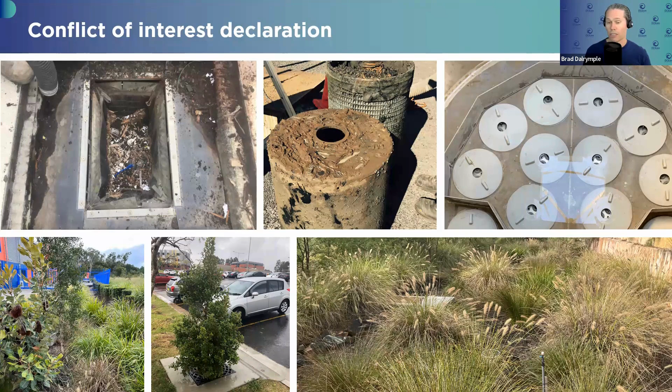So that's pretty cool. And look, before I dive into the main presentation, just a conflict of interest declaration. So yeah, obviously I work for Ocean Protect. I'm their principal environmental engineer. Ocean Protect do make money from selling stormwater treatment assets. So we make money out of installing them and maintaining them. So just keep in mind that I do have a conflict of interest in this space. But throughout the presentation, I've tried to be as transparent as I possibly can. But yeah, it's just worth noting that, obviously.

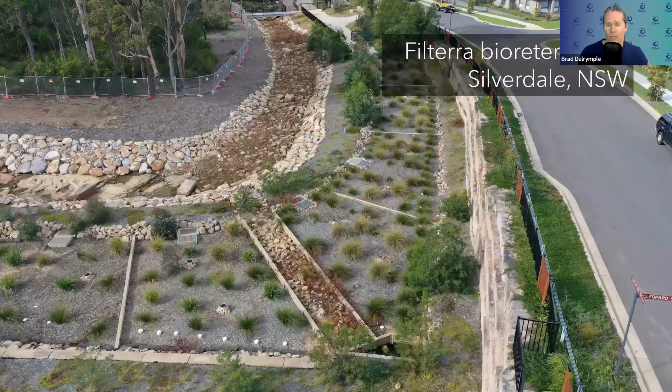So first up, integration. The key considerations when it comes to getting integration of assets, so bioretention, wetlands, swales, GPTs, SQIDs, are these: maintenance, access, safety, area usage, and amenity. So if I show you some examples, these are good examples of good outcomes. Really good amenity, really good stormwater treatment function, maintenance, access, etc. Ticks all the boxes, and there's a lot of examples like this across Australia, which is great. So these are bioretention systems, for example. This is a Filterra bioretention system. It was a very constrained site, but we managed to integrate it appropriately.

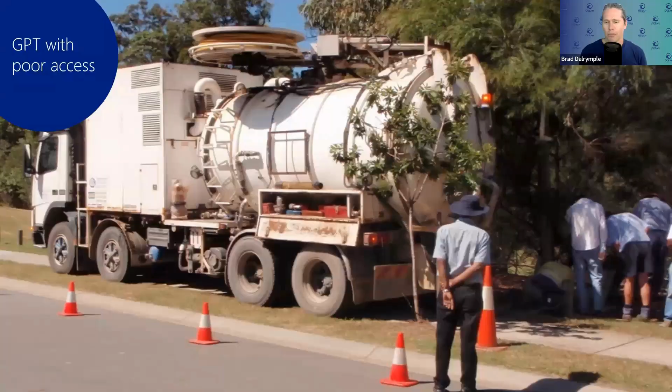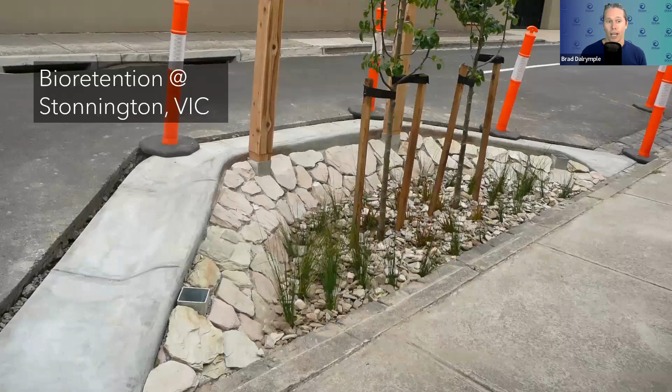But unfortunately we often see this. So again, one thing to keep in mind when it comes to your development assessment or development review would be trying to make sure, to the best of your ability, that the integration is done properly. And this is a classic example. This is the one in Brisbane, in Brighton. This is the bioretention system, by the way. Retaining walls around all sides of the bioretention system.

There's like a 1.5 meter or 2 meter drop on the downstream side, and obviously high retaining walls around the whole thing. And to get into the system, you have to climb via a ladder into the bioretention system. So very, very difficult to access, maintain, etc. And obviously, this is just a bad outcome.

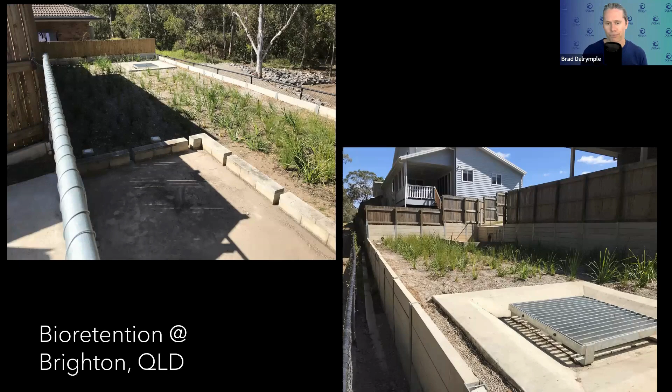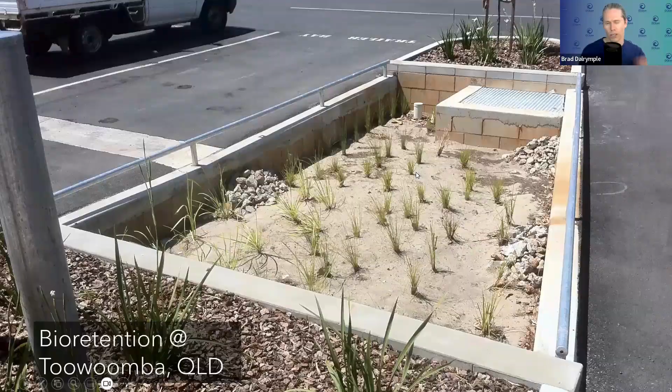And I've shown this example before where, if you just fall into the bioretention system, you probably trip, and by the time your head reaches terminal velocity, it's probably coming into contact with a concrete edge on the other side of the system. So we laugh about it, but it does happen, and certainly through appropriate design review, and maybe development design assessment, from council's perspective, we could have avoided something like this happening.

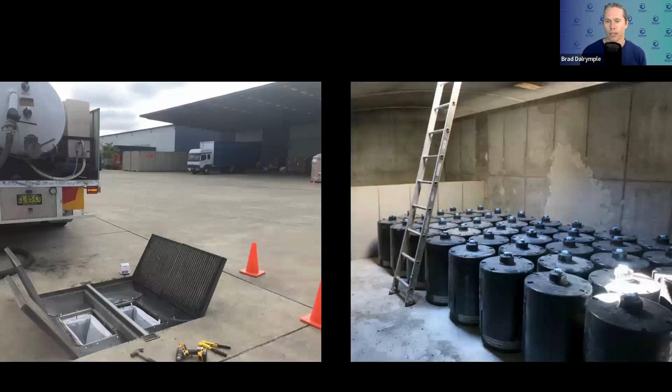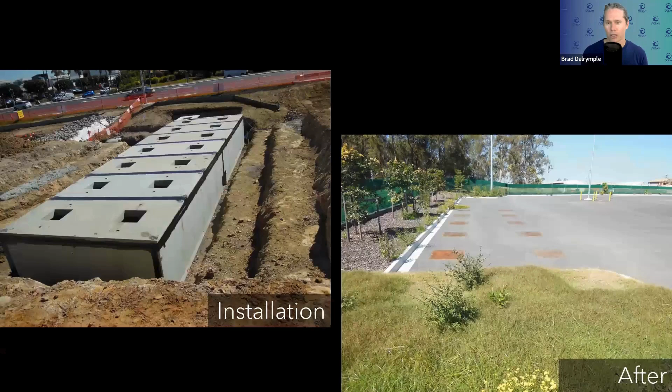Sometimes the easiest option in terms of achieving good integration is just putting it below ground. Now, again, conflict of interest, Ocean Protect sell devices that can be integrated underground. But from my perspective, it's often the best solution, particularly for a constrained site. And a lot of sites are highly constrained, even with the best planning and conceptual design in the world.

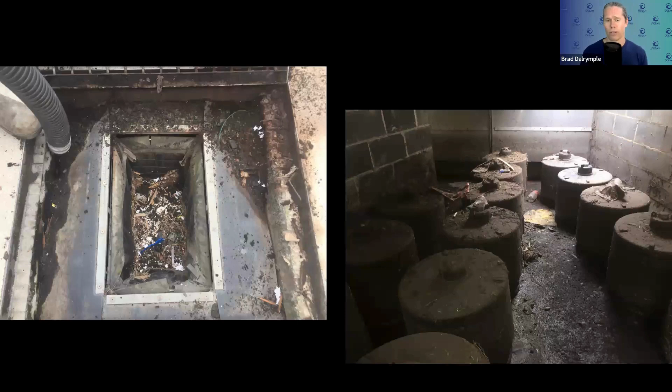So in this case, for example, we can put in a detention tank or a chamber as part of the civil construction, and then just cover it over with, in this case, asphalt, but it could equally be landscaping, grass, etc. And then obviously you can easily access these to maintain via a sucker truck or whatever. The pollution is away from the public, so there's no risk of that contact. And it's basically easy to maintain.

So that's a quick overview of some key considerations when it comes to integration. Let's talk about water quality now. And it's worthwhile noting that water quality and hydraulics basically go together hand in hand. And I'll explain that in a sec.

So a key assumption when it comes to stormwater treatment assets is that they will function as intended. So when you're setting up your MUSIC or whatever model you use, there's a key underlying assumption that the system, whether bioretention or wetland or GPT or whatever, will function as intended. And there's a whole bunch of assumptions that go into that. First up, you're assuming that the asset's going to be in good condition. Number two, you're assuming that the treatment system is fully utilized.

And also, particularly when it comes to proprietary devices, and again, full disclosure, we make proprietary devices, there's an assumption that everyone can be trusted when it comes to their performance claims. But unfortunately, time and time again, that's shown not to be accurate. And I'll show some examples in a sec.

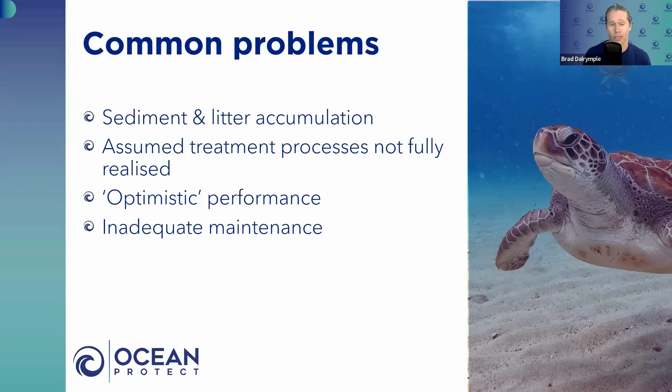So in terms of that assumption being wrong, these are some common problems that I see. Sediment and litter over-accumulation, number one. Sometimes the treatment device just isn't utilized to its full extent. I'll show some examples in a sec. Optimistic performance claims I touched on, and just poor maintenance. So I'll show you some examples.

And I was just looking at a project just a couple of days ago around this. Won't mention where, just because I think they're actually tuning into the webinar today. But this is a common scenario, unfortunately.

But even construction phase sediment loads aside, and we know that they're higher than the operational or fully developed phase, we still see a lot of pollution coming from fully established urban catchments. And I've shown this example before. This is what we pulled out.

We had 8 gully pit baskets, 8 OceanGuards, in a pretty stock standard street in Western Sydney, and they were in the ground for 5 months. So just 8 OceanGuard gully pit inserts in the ground for 5 months, treating a reasonably small catchment, and you can see what we pulled out. And this is again a fully established catchment.

So a bunch of plastic, bunch of everything, typically single-use plastics, obviously a whole bunch of sediment, and that stuff isn't just going to magically disappear. That's going to have to be manually removed from, in this case, the devices. But also, if the devices weren't there, that'd just go straight into a downstream waterway or other secondary treatment device.

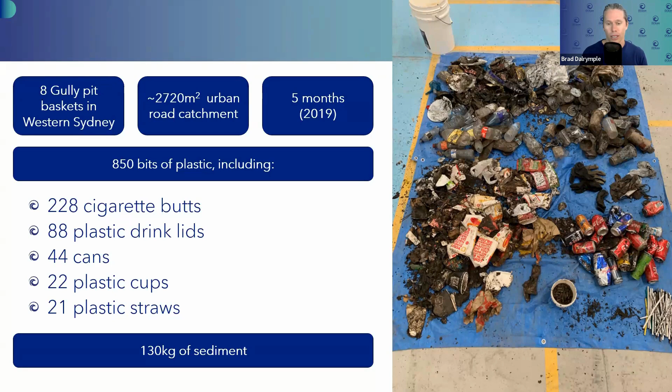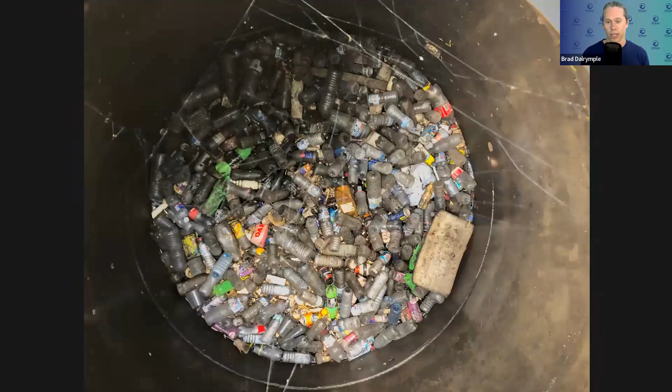And I showed an example of a bioretention system full of litter the other day on LinkedIn, if you've seen that, and obviously we've got a whole bunch of photos of end of line GPTs full of sediment, full of litter, etc. And these are some photos courtesy of Dan Rhodes, I think, who is on the call today. Yeah, this pollution just doesn't magically disappear. It needs to be appropriately maintained, and obviously, if the GPT is completely full, it just won't work. Okay, so the assumption that it's working is often not accurate at all.

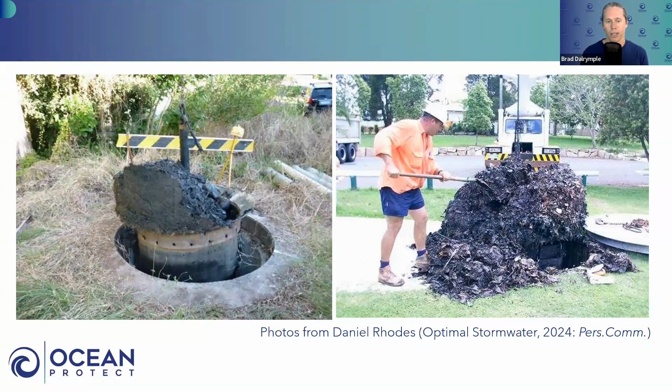And another example of this is from Ralf Pfleiderer from Wave Consulting in Victoria. These are some bioretention systems in Little Collins Street, just full of sediment. So Little Collins Street, fully urbanized, nothing but shops and roads and all that sort of stuff, just full of sediment. So I think a lot of stormwater professionals forget that you can still get a lot of gunk, even sediment, from completely urbanized environments with no exposed soil. I remember Ralf talking about how there's a lot of hair in these bioretention systems. So yeah, a whole bunch of gunk comes from our urban environments, unfortunately.

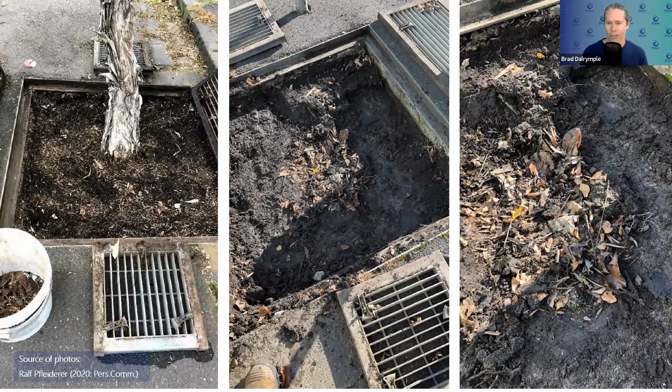And bioretention systems are a physical filter. They obviously have biological processes happening, but that sediment, that litter, will accumulate, and it obviously needs to be removed. And if it doesn't, the system probably will have an impaired function.

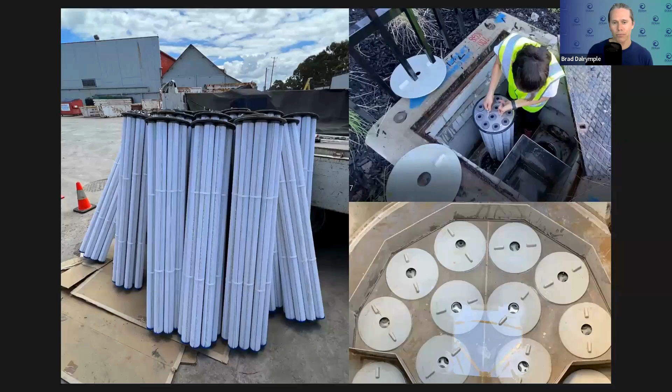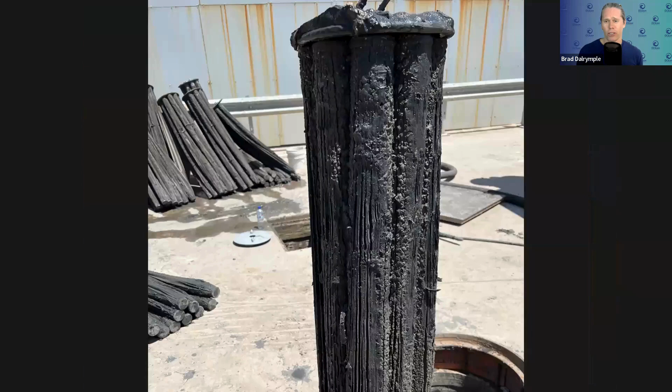Another example, this is new jellyfish tentacles going underground, and that's what they can be like after they've been in the ground for a while. So again, new jellyfish tentacles, membrane filtration. For me, it just shows you what is in stormwater. This pollution, the hydrocarbons, the dirt, the microplastics don't just magically disappear. They need to be appropriately maintained. And if we just leave these assets in, or if they're undersized, etc., they will not function as intended.

Also, a common thing I keep seeing with bioretention systems, and particularly bigger bioretention systems, is there's an assumption that the water just magically spreads over the entire system, because that's what MUSIC assumes. MUSIC assumes that water comes in, ponds and then drains down equally across the entire filter media surface. The reality is that just doesn't happen for these bigger systems.

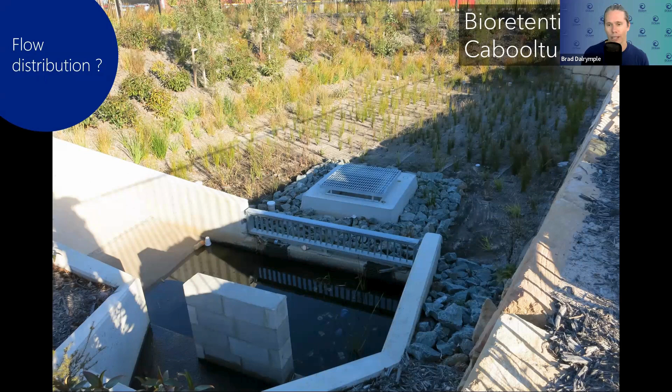So this is one in Caboolture, I think, by memory. Can't remember, I took the photo. Inlet coming in, and you've got the outlet pit immediately adjacent to the inlet, and obviously you've got areas still within the bioretention system that will probably struggle to get much water at all. Obviously, if you get a whole bunch of water coming through, the whole system will pond, etc. But yeah, in the majority of events, the small frequent events, the water will basically dissipate around the inlet, and we see that time and time again. So again, the model not matching the reality, unless it's appropriately designed with good flow distribution.

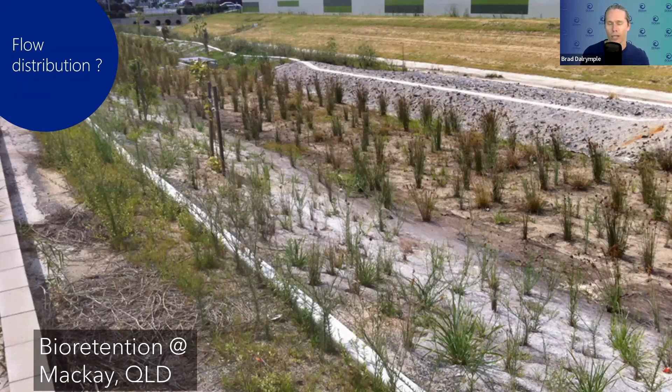This is another big system out at Mackay, a very long system that, again, is probably another example of poor flow distribution. There's an assumption that the entire system will be engaged in treating water, but it just won't happen. Often the plants will die a very slow and painful death.

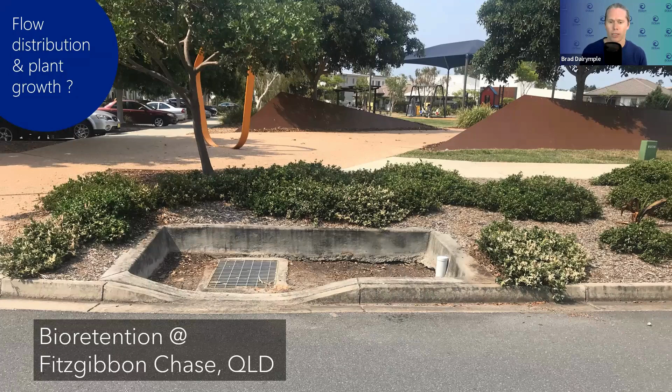And this is another classic example. This is out at Fitzgibbon Chase in Brisbane. There's quite a few of them like this, or at least last time I looked. The water will come along via the curb and go into this, which is supposed to be a bioretention system, via this curb cutout, the inlet, but the outlet pit is immediately adjacent to the inlet. Obviously, there's no plants, but this will obviously not function anything like what is modeled in MUSIC. So again, poor design and poor implementation means the system will not function as intended. And like I said, there's a few of these around Fitzgibbon Chase, or at least there was. I'm hoping council might have fixed them up by now.

So key recommendations in terms of this, I guess, water quality and hydraulics integration piece. And I guess this is a bit of an overarching statement, but there's a real need to make sure through your design review, design, et cetera, that the assets will function or likely function as intended.

A key thing I keep seeing is that appropriate maintenance access isn't provided. This is essential. So again, as part of your design review or construction establishment review or handover, making sure that at the very least the assets are appropriately accessible for maintenance is absolutely essential.

Obviously, during the construction establishment, there should be some sort of review and inspection. Water by Design and others have a whole bunch of checklists that you can complete to help achieve that. And for privately owned systems, and I'll touch on this later, for me it's essential that prior to any development approval, there's some requirement for ongoing condition assessments and maintenance of any assets that are put in the ground.

And again, when it comes to operation, there's a requirement to do checks to make sure the assets are appropriately functioning as intended. And if you're in council or a regulatory authority, ideally you review and enforce the condition assessment and maintenance requirements that are ideally agreed prior to development approval.

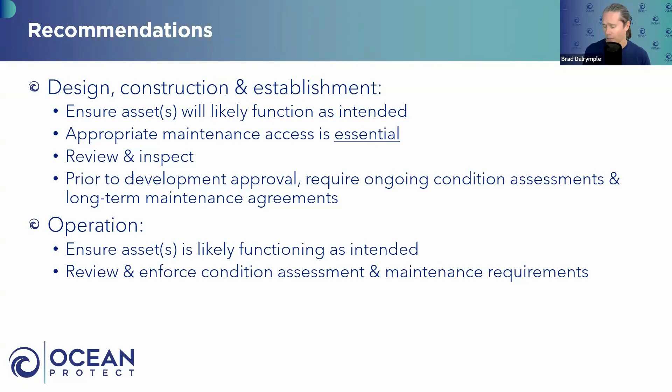I'm going to touch on proprietary SQIDs quickly. I guess the key thing from my perspective is the exaggerated claims around performance, whether that be water quality or hydraulics or maintenance. And this is probably an example of a device that I would perceive as making an exaggerated claim. I won't mention the device's name, but this is from their website, at least

historically. This device claimed extremely high rates of pollution removal: 100% removal of litter, 99.95% oil water removal, 97% removal for phosphorus, 95% removal for solids, and 85% removal for nitrogen. So no fancy absorption or biological treatment processes going on. It's basically relying on physical processes. And I'd suggest that those claims are extremely high.

But if you look at the data that the claims are based on, I don't think the data that's available, or at least the data that I've seen, would be enough to appropriately substantiate those claims in the real world. This is again from the same company's website. This is the information around their performance claims, and for me there's a few question marks on the methodology used

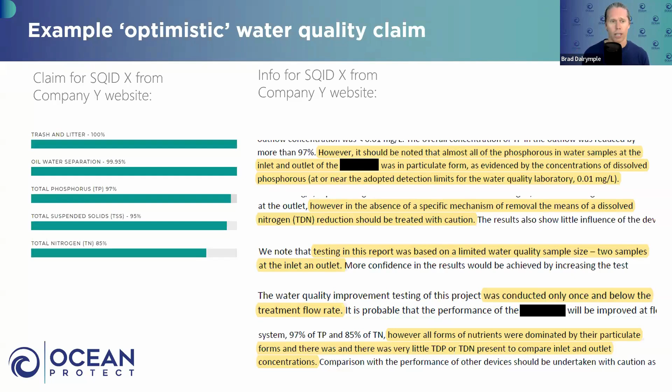And we know that dissolved nutrients are certainly present in the real world, but they did a mix of their own pollution, dosed that and took samples in the inlet and outlet, and that's what they based their claim on. They did the testing themselves, which again, I'd question the independence of. And it is a lab scale test, which invariably isn't accurate to reflect real world performance. So again, I'd question the claims, and I'd suggest that they're probably optimistic.

To give you an example of this in the real world, and another device: this is a gross pollutant trap. This is a project that's just come across my desk recently, a project in Brisbane. So just a development, proposed to drain to a gross pollutant trap, and this gross pollutant trap will achieve, according to MUSIC, extremely high rates of pollution removal. So 82%, 80%, 50%, etc. And that's extremely impressive for a gross pollutant trap.

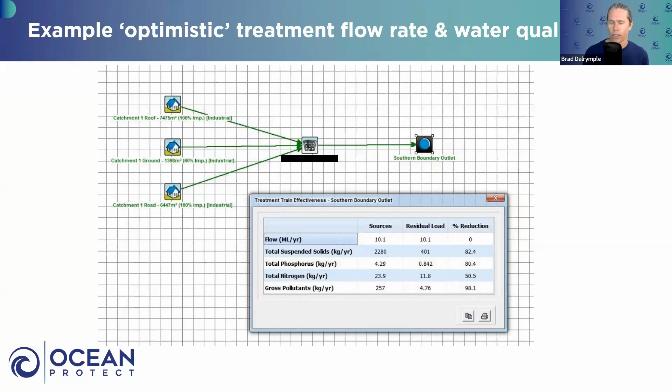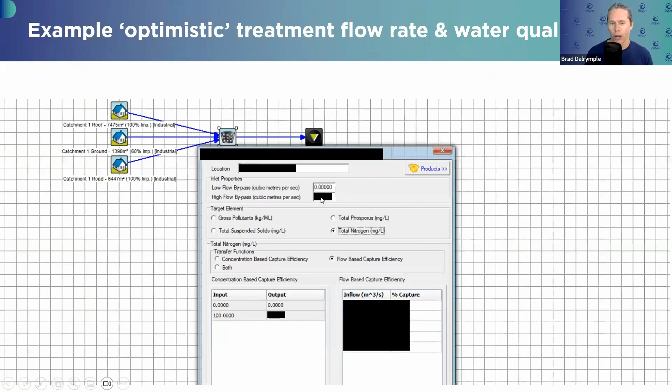If I was in council's position, or if I was reviewing that, there's a couple of things I would check. The first thing I'd check would be the high flow bypass. This is when I talk about hydraulics and water quality going hand in hand. To do that, you double click on the treatment node, the GPT, and check the high flow bypass rate. Just make sure that the high flow bypass is actually relevant to the GPT specified.

Now, this is something I see time and time again. A small GPT will actually be proposed, with a certain cost, but they've actually modeled a much larger, more expensive gross pollutant trap, or a device with just a really high treatment flow rate. A GPT, and any generic treatment node, will remove pollution up to a certain treatment flow rate, a high flow bypass.

Anything above that is bypassed. So any GPT or other device, like a proprietary cartridge, for example, will have an ability to remove pollution up to a certain treatment flow rate. Anything below that flow rate, it's treated to that standard. Anything above that flow rate, that high flow bypass, is bypassed. So this for me is a key thing to make sure that you're checking in terms of the MUSIC model, making sure that's okay.

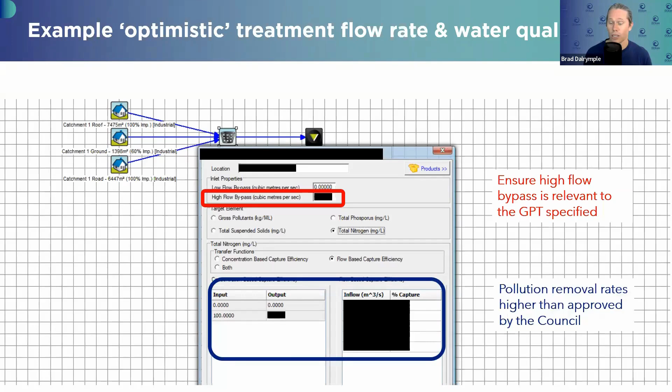But the key reason why in this scenario the performance claims are very high was, and again I blacked out certain things just to protect the anonymity of the people involved,

their GPT transfer functions, or their pollution removal rates, which they've plugged into their GPT node, are just higher than what's actually approved by, in this case, Brisbane City Council. Brisbane City Council have nominated a certain amount of pollution removal that is acceptable according to their processes. And that's a debate as to whether that's appropriate or not. But that aside, council have their own approved performances, but the model itself has applied far higher pollution removal rates than what's actually approved by council.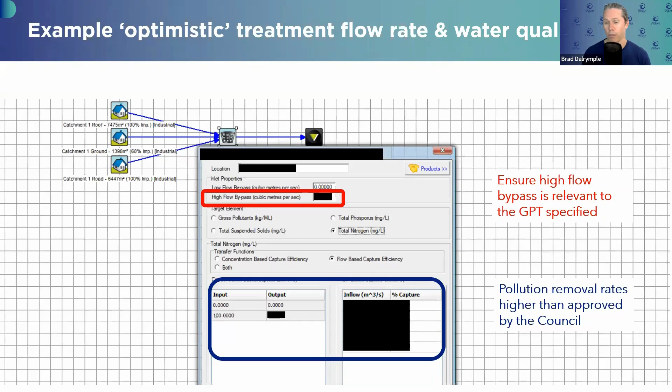So again, if I was in council's position to check development assessments, number one, I'd be asking for the MUSIC model. Obviously, you need a license in MUSIC to open a model. These, for me, are the key things I check: the high flow bypass rates and the transfer functions within the GPT and all generic treatment nodes.

Another example of optimistic modeling is stuff that just can't be done. In this case, from a review of the design drawings, it's physically impossible for these catchments to drain to, in this case, some sort of GPT. So fundamentally, hydraulically impossible. And again, it's something that we do see, unfortunately, in some situations.

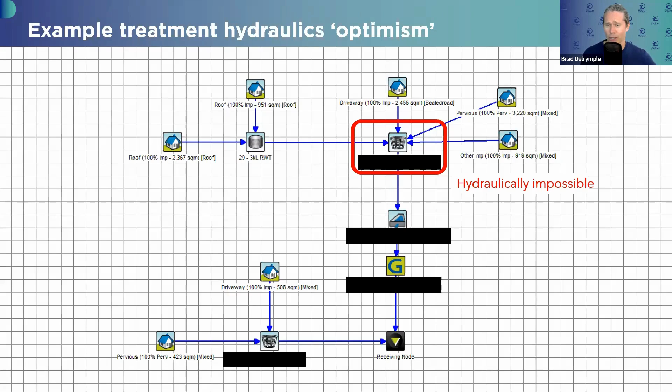Again, this is another example. They maybe accidentally made a mistake using the same land use for different parts of the catchment, but using different pollutant export characteristics, which by memory gave them a favourable result. So, unfortunately, when it comes to review, it's a good idea to check the MUSIC models, and in this case, make sure that reality is going to be appropriately represented in the MUSIC model.

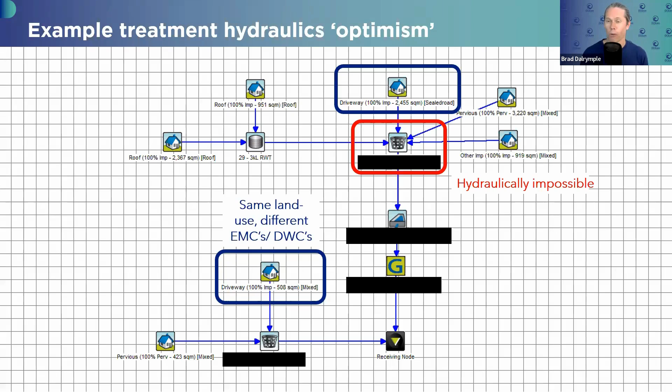And then you've obviously got the claim. I mentioned that claim before about that one device claiming, I don't know, 97% removal for phosphorus. And there's a tendency of just wanting to believe these values, or you believe what council will accept. A lot of people say, oh yeah, I don't believe this device actually works this way, but council say it's okay, so it must be okay. I just don't buy that at all. So while some people want to believe, my advice is trust no one.

And full disclosure, former X-Files fan, hence the references.

But look, if I was to provide any advice in relation to reviewing performance claims, I'd just ask for the proof. If someone wants to make a claim about their individual device's performance, I ask for the proof that has gone into substantiating that performance claim. I can provide some advice around what you should ask for, but they should just provide that, and it should be provided without any distribution restrictions.

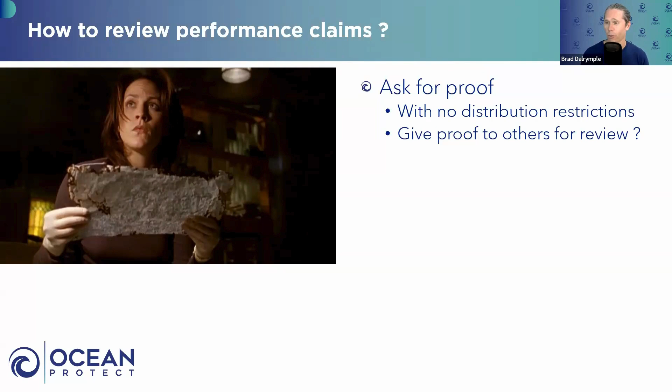So you could take that proof and give it to someone else like me or whoever to do a third-party review. And you're never going to get a better reviewer of a performance claim than probably their competitors in this space. So I'd certainly ask for proof.

There are protocols available though. I think most people on this call would be familiar with Stormwater Australia's SQIDEP, the Stormwater Quality Improvement Device Evaluation Protocol. That provides a procedure and a process to verify the performance claims for proprietary devices. To the best of my knowledge, and I might be wrong, this is only currently applied in some parts of southeast Queensland and the Aerotropolis in Western Sydney.

So it hasn't really got wide distribution for a bunch of reasons, and it's not currently endorsed by Stormwater Victoria, Stormwater New South Wales or Stormwater Queensland, probably because there are some known deficiencies in the process. But 10 devices so far have been verified via this SQIDEP process. So Stormwater Australia have given verification certificates for 10 devices, saying those devices comply with the SQIDEP requirements. And those 10 include 4 from Ocean Protect.

So is it perfect? No. Is it widely applied? Not really, at least external to Southeast Queensland, but it's at least something.

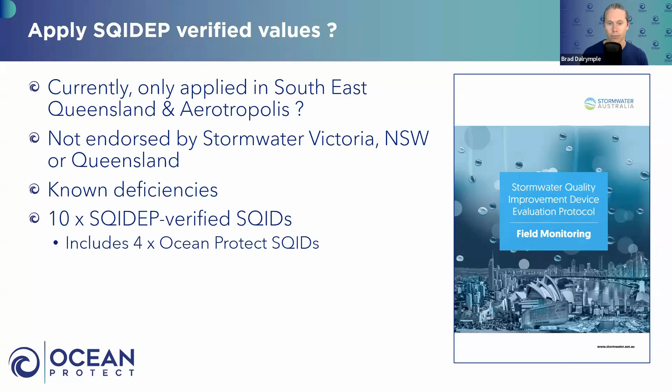The other alternative is to look at what other councils have done, and probably the leader in water sensitive urban design in Australia is Blacktown City Council, and they have gone through the trouble of reviewing a bunch of proprietary devices and determining their council approved performances, and they actually provide these nodes as part of your MUSIC license as well. So for me, this is actually a pretty robust and suitably, I guess, independent, verified process. And a bunch of assets have already gone through that process.

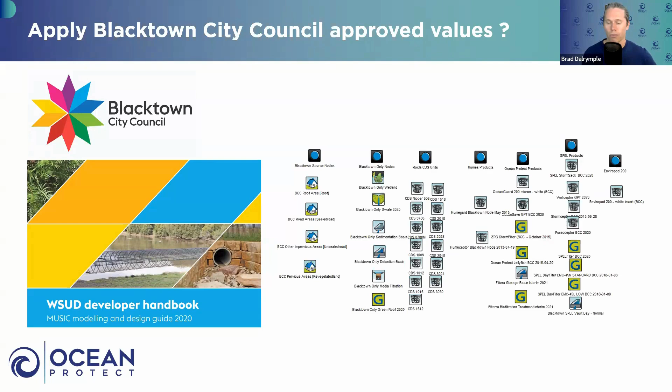Again, is it perfect? Probably not. I'm sure it's a lot of work for council, but at least it's something to look to consider when you're reviewing the performance claim. But fundamentally, I just wouldn't buy into the process of just accepting the claims and saying, oh, as long as council accept it, or as long as the manufacturer has provided some sort of verification, that's all hunky-dory. No, that's something I definitely would not recommend.

What I would recommend is, again, asking for the proof with no distribution restrictions. Consider providing that proof to others for independent review if you haven't got the expertise or the capacity in the space to review it. Or review and consider the SQIDEP and/or Blacktown City Council approved values for those proprietary devices.

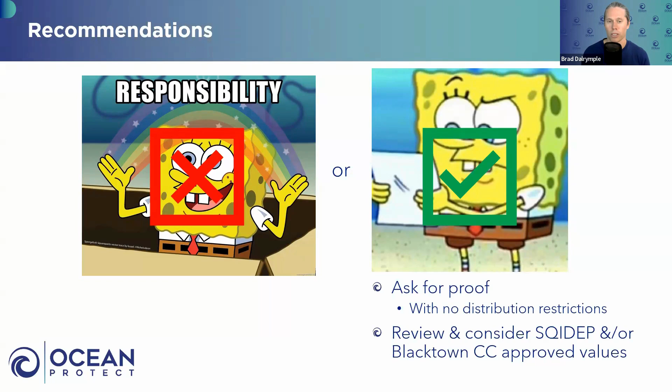If I'm honest, I'm hoping in the years to come this will improve, because it's a little bit of confusion. I know it's a lot of work for individual councils if they want to try and develop their own process and apply it. Hence why some councils, at least in Southeast Queensland, have applied SQIDEP. So I don't belittle the fact that there's a lot of work involved in doing this. But my recommendation remains to not just blindly accept whatever the manufacturer claims, or even what council would accept, because often councils don't have the resources to appropriately check the performance claims of every device on the market.

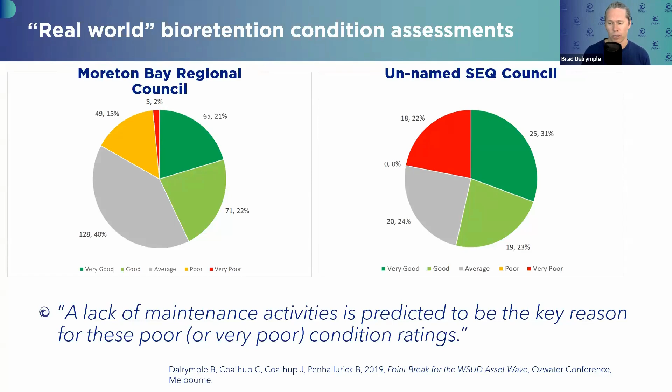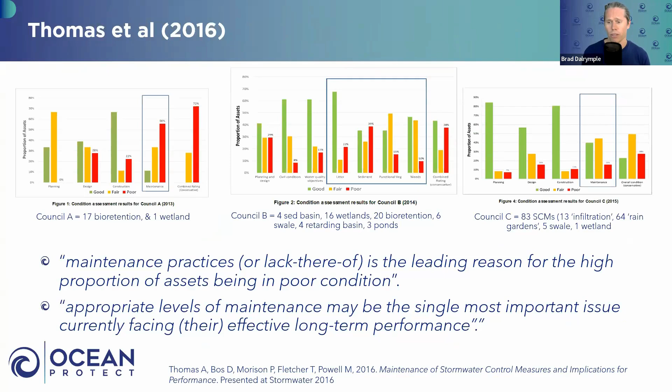Similarly, a decent-sized council in Southeast Queensland found about 22% of their bioretention systems needed major rectification works. And again, I recognise I'm quoting myself here with all the ego in the world, but a lack of maintenance activities is predicted to be the key reason for these poor ratings. It's not just me that has said this previously. Andrew Thomas, President of Stormwater New South Wales, and others did a review of a bunch of assets a few years ago, and basically the same finding. The maintenance, or lack thereof, is the leading cause of a high proportion of assets being in poor condition. So all assets need maintenance.

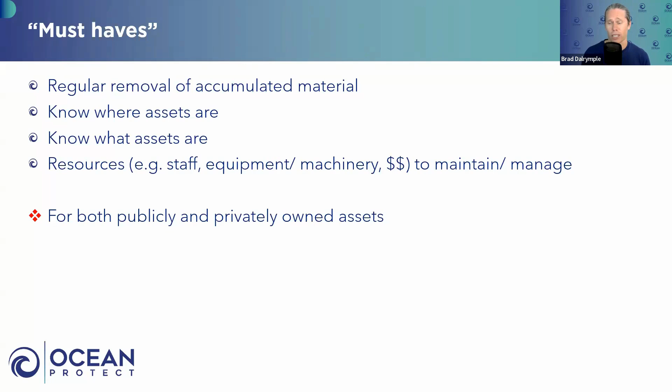Okay, so there's a bunch of must-haves. You need to regularly remove the pollution. To do that, you need to know where the assets are. You need to know what they are, and you need to have the resources, obviously, to appropriately maintain them. And that's applicable for both publicly and privately owned assets.

Now, when I've given similar training before on this topic, I used to say just use Blacktown City Council's development assessment conditions. But more recently, you would have seen Ocean Protect and Daniel Ryder in particular helping develop a WSUD maintenance compliance framework. And that's had a whole bunch of involvement from a whole bunch of stakeholders.

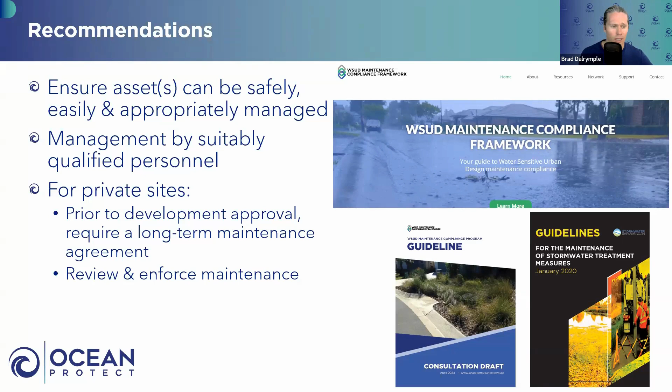It's endorsed by the likes of Stormwater Queensland, Stormwater New South Wales, Optimal Stormwater, all the cool cats. And I know it's a big document. There's a lot of information, a lot of work's gone into it. But if you take nothing away from this webinar, what I would suggest if I was in council, I'd actually just go straight to Appendix A of the WSUD Maintenance Compliance Program and have a good look at the conditions.

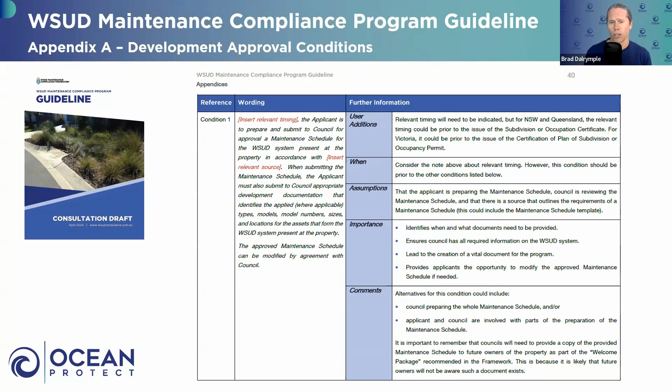Sorry, the development approval conditions, and it's all about just making sure that assets are appropriately maintained. So you can literally copy and paste the words straight out of here and use them in your own development approval conditions if you're in individual councils. And they're based historically on a little bit of Blacktown City Council and probably others, but you can literally just take these verbatim. Obviously, you can review them and apply them to make them relevant to your LGA.

But for me, the hard work's been done, at least in terms of developing appropriate wordings for development approval conditions to help ensure the appropriate maintenance of assets on privately owned sites. So if you're keen to find out more, just Google WSUD Maintenance Compliance Program.

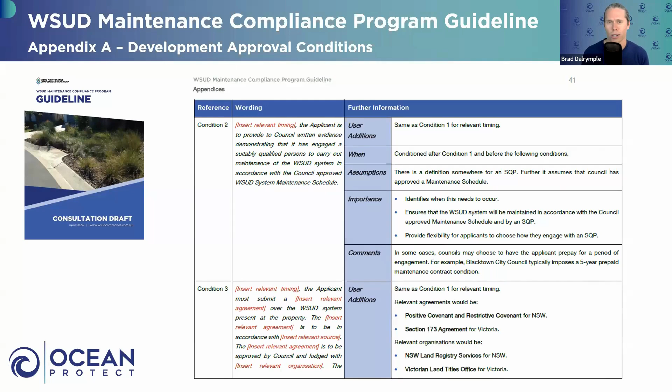So key considerations, and look, I've charged through these. For me, again, just to recap, these are the key considerations in terms of the development assessment process. And whilst I know they can be considered challenges and problems, for me, it's a real opportunity to make significant improvement to help better protect our waterways. I know it's not easy doing the development assessment, and I know a lot of things can go wrong, but if we can do it right, and there's a few things, as I've touched on today, that we can particularly focus on, I think that can turn a problem into a significant opportunity to help better protect our waterways.